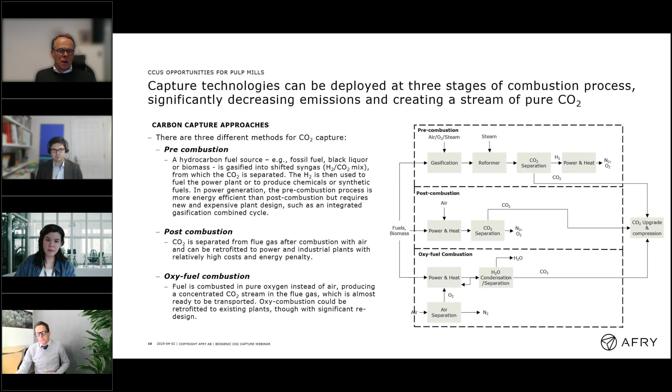And then for the third last box here at the bottom, one additional thing you can do with post-combustion is to oxify your boiler, which will give you a more complete combustion, resulting in a higher CO2 concentration of your flue gases. This opens up for less complex separation steps downstream of your flue gas, and I will touch a little bit more about that when we look at emerging technologies. So for pulp mills specifically, what are the benefits of post-combustion?

There's a couple of edges that you have within the pulp mill sector. For starters, you have a fairly high CO2 concentration in your flue gases usually. This is compared to heat and power, where it can be as low as 4% and usually never over 10. And depending on the stack, we often reach up to 20% when we're looking at pulp mills. In general, the higher the concentration of CO2, the easier it is to extract the CO2. You normally also have fewer contaminants than, say, the waste to energy sector, which means that the cleanup steps are usually a bit less complicated.

Secondly, many pulp mills have large volumes of flue gas for each of your sites compared to other industries. I do compare a lot to the energy sector here because they have at this point in time come a bit further when it comes to implementing carbon capture. But when I say large scale in the energy sector, it's still not as large as the potential in the pulp mill industry. And there's a reason why this is one of the main points here, and it is that with a lot of these new or emerging technologies, economy of scale definitely plays a big part in the bankability of the projects. So it's very useful to have large volumes.

The last point here is in a lot of the established mills, you have good utility systems already with various sources of heat, which could be utilized. Different capture processes consume different types of utilities, which is why there isn't necessarily a one-size-fits-all solution. But because the host sites are fairly flexible, usually you consume your utilities that you produce within the battery limit, we can usually find a solution that works.

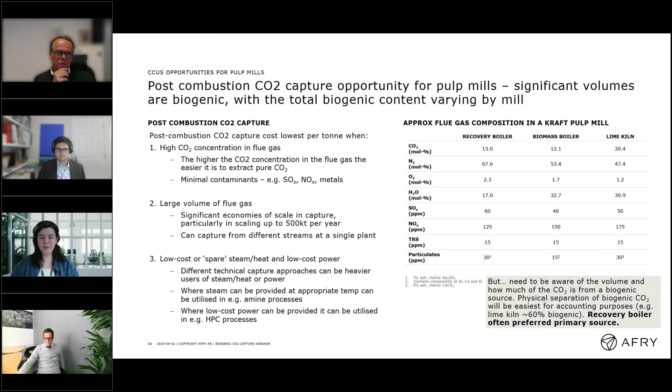Stuart, if we go to the next one. Both amine and HPC technology fall under the category of absorption technology. This means that they use a solvent, either chemically or physically, to remove the CO2 from the flue gases. The processes that we mainly talk about, amine and HPC, are both very well known and established processes. They come from the petrochemical industry, where they've been used traditionally to remove CO2 from processes in order to vent them. That's to avoid buildup of CO2 in the plant or in the process.

And although they're well known, they've definitely been reinvented slightly to fit the application of carbon capture, where the CO2 is seen as a product stream, not just a rest or a waste stream. For amine technology, we know that's being used on several projects that have recently taken FID. I think the first one will be commissioned soon, and HPC is being used in one of the projects that took FID recently. I think Stuart will mention them later as well. So it's the first time that we're seeing these technologies at large scale, and we're optimistic that they can be optimized and adapted quickly and implemented into other and larger projects in the future.

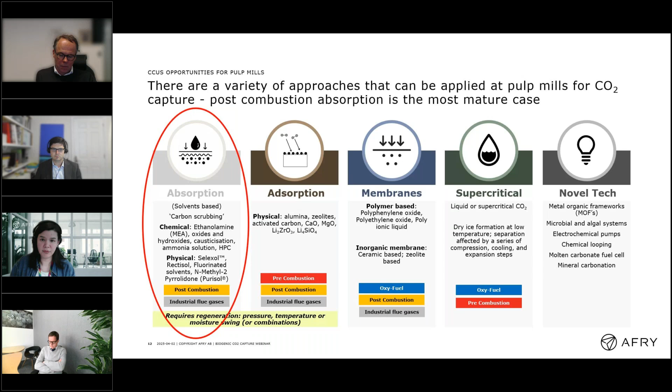Just to run through them very, very briefly without going into too much detail here. Amine scrubbing usually uses an aqueous solution and operates on a temperature difference. So the key here is that you heat up in one of the columns and you cool down in the other to absorb and desorb the CO2. The process requires a heating source. Usually that's low pressure steam. And it's worth commenting as well, for both the amine and HPC, you're introducing a chemical to your site. Amine is not the nicest chemical, so there's a hazardous aspect involved in this as well.

For HPC, it works on the same principle, where you are absorbing and desorbing the CO2. This one works on a pressure difference, so you need to pressurize your flue gases up to around 8 bar, or higher, up to 20 bar, and then depressurize them to be able to desorb them. So whereas the amine technology uses steam, this one uses a lot more electricity to compress the gases in comparison. But fundamentally, they work on the same principle of absorbing and desorbing. And again, these are the two that have been most seen in the press, and these are the ones that have taken FID in some of the large-scale projects that we're seeing right now.

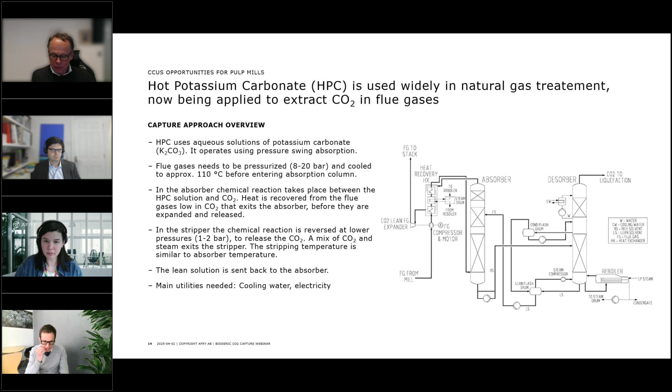I also wanted to mention a little bit about the emerging technologies. So I'll go through two of them here that I think are usable or applicable to this industry specifically. Whereas the other two were absorption based, the ones that I want to talk about are adsorption based, and I'm not going to necessarily go into the fundamental differences between the two, but adsorption is you fix something to a surface, whereas absorption is the two are mixed together entirely, in very, very easy terms.

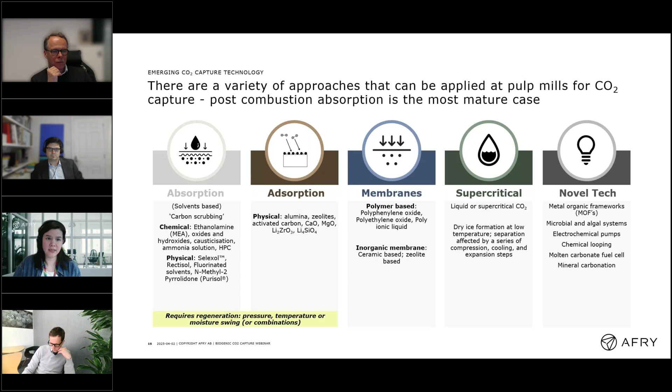One of the ones that is very much established is cryogenic separation. I'm sure you've all heard of companies like Linde and Air Liquide, who deliver very large scale cryogenic plants across all industries. Here, they've started adapting their flow sheets for CO2 separation specifically. So you would use a pressure swing system where you adsorb the CO2 and then release it again. And then you have a cryogenic distillation unit in a cold box and you get liquid CO2 out. And that's one of the main benefits of this as well.

And one of the reasons that this is worthwhile mentioning here is that this process technology specifically really lends itself to economy of scale. So the larger the volumes you have, the bigger a positive impact it has on the capex or the cost per ton of CO2 that you get out in this kind of system.

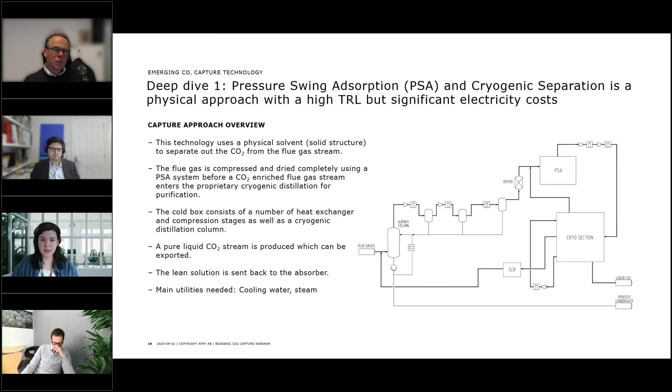Also, it's a benefit that you would then export the CO2 in its liquid form already, so there's no need for further liquefaction after this process. The other one, which is also a physical sorbent, is MOF, metal organic framework. This is a bit more novel, but works on the same principle as pressure swing adsorption, except that it's temperature driven.

So you have a big circular solid structure that spins on its own axis, and you pass the flue gases through one of the sections, and it then rotates on to where the CO2 is released using steam from the next section, and then the frameworks that come in cells are reconditioned with cold air. One rotation is about 60 seconds, so it's a fast process and it's easy to ramp up and ramp down.

The benefit of this system, of this technology, is that you can use low-grade heat for the steam side here. Usually the low-grade heat, if you have steam below 2 bar, is not really usable heat in a lot of processes, but here in this case it is. So you could potentially use waste heat from your plant in this.

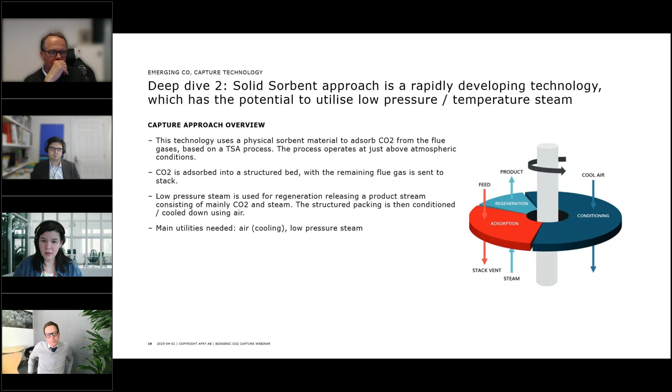And just to touch briefly as well on oxyfuel. Now, the oxyfuel process itself is not really a carbon capture process. What you do is instead of firing your boiler with air, you can increase the oxygen content, even up to pure oxygen firing. And by doing so, you aid the complete combustion in that block, which increases the CO2 content of your flue gas. And depending on how much you increase that CO2 content by, you could potentially cut out the carbon capture step altogether and just purify the flue gas stream coming out and liquefy it.

So the downside of this is obviously that it's a retrofit to existing plants that interrupts one of the core processes in the plant already. So it makes more sense if you have a green field, for example. Also, the issue of getting the oxygen there. If you have an air separator unit, it's usually a big CAPEX investment as well as an OPEX issue. If you have the opportunity to co-locate your carbon capture with a user of the CO2 that also produces hydrogen from electrolysis, you could potentially use the oxygen from that electrolysis as a byproduct to fire in your boiler. So there is potential here.

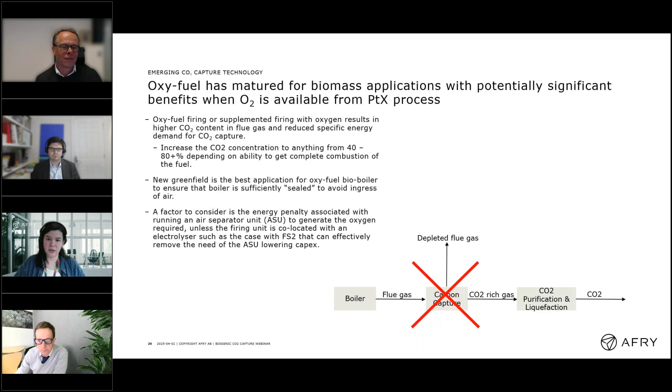And then just for the last one, I wanted to do a quick comparison of the traditional ones and these novel new technologies. As you can see, there are pros and cons in each, and different clients will put different weighting on what they think is important. Some people think technology readiness is very important, so that something is proven and has a good track record. Others find that CAPEX is more important, or OPEX even.

But I think the important take-home is that even with the traditional and new emerging technologies, there are a lot of different solutions that could potentially enable carbon capture in the pulp mill industry. And we can tailor them to suit whatever needs the client has in most cases. And then a question that's asked a lot is, what do you then do with the CO2 once you've captured it? And that's where I'll pass back to Stuart to answer that part.

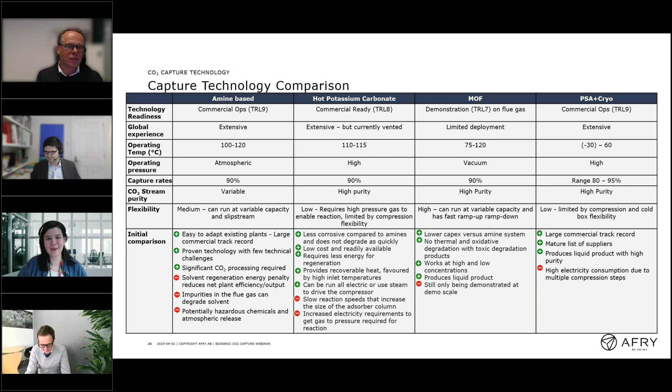Yeah, thanks, Katarina. That's great, and you've stuck exactly to time, so we do have a few minutes to talk about exactly what we do with that CO2, and the commercial opportunities. So both why we're doing what we're doing, and then what choices we have once that CO2 has been captured.

So just to start at a high level, this is a very high-level process. We've already talked about the CO2 source and the capturing part, and then moving left to right through the transport, we have a choice really whether we go down a storage route. So CCS could be onshore storage, which is being developed in the likes of Denmark and some places in the US and Canada, or offshore storage, which is the more common European choice currently.

And if we look at the top route there, where we've got that grey dot, that corresponds to fossil CO2. Where you're taking fossil CO2, capturing and storing it, your key driver is carbon tax, the EU Emissions Trading Scheme. Sometimes that carbon tax is also stackable, so we have a higher carbon tax than just the EU ETS. And if you capture and store that CO2 rather than emitting it to the atmosphere, it's counted as not emitted under the EU ETS. We've had that since the CCS Directive of 2009, and so you avoid a cost.

You avoid that EU ETS cost, or that carbon cost. If we look at the line down from that, that is looking at if you capture biogenic CO2 and then you're storing that, so that you really are accessing this voluntary carbon market. So you're going through a process of certifying your CO2 that has been captured and stored, and working out what the net impact is, the abatement that's occurred because of that. And then you're able to sell those certificates, and often those are being sold to large corporates currently, and that gives you this voluntary CO2 removal certificate.

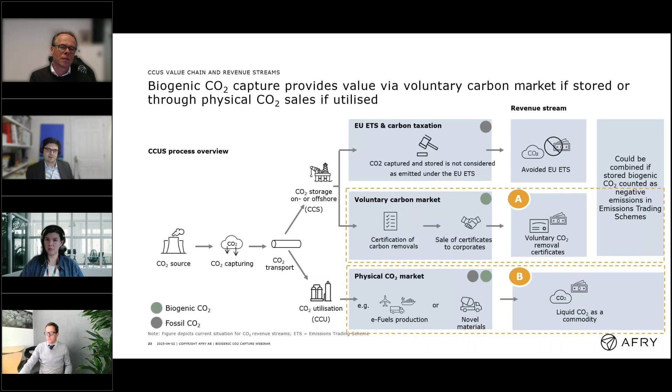So case study A here. We're looking at those two primary routes for biogenic CO2. This is the example of Stockholm Exergi. I started writing this slide a few weeks ago, and the good news, if anyone didn't spot that, is that this project took FID last Thursday, so reached financial close and is going ahead. The project is run by Stockholm Exergi, which, as the name suggests, is a large power and heat provider based in Stockholm, providing power, heat, and some cooling services to about 190,000 households in the Stockholm area. And that was an important underpinning revenue that they had for this project to get the CCS project done. The base site is there and generating revenue and providing those services.

The project is actually piping that flue gas out from the site to the harbour, and then is capturing that CO2 at the harbour. So Saipem are involved there as the EPC provider using Capsol HPC technology. And then that 800,000 tons of captured CO2 is getting taken to Norway to the Northern Lights project. Also worth noting that Northern Lights Phase 2 also took FID off the back of it. So you're starting to see this chain developing and going forward together, as we need to see in CCS. Crucial to the success of this project is the left-hand side of this diagram. This is the ability to stack grants and stack operational phase revenue in order to make up for the quite significant capex costs, which we'll talk about in a moment.